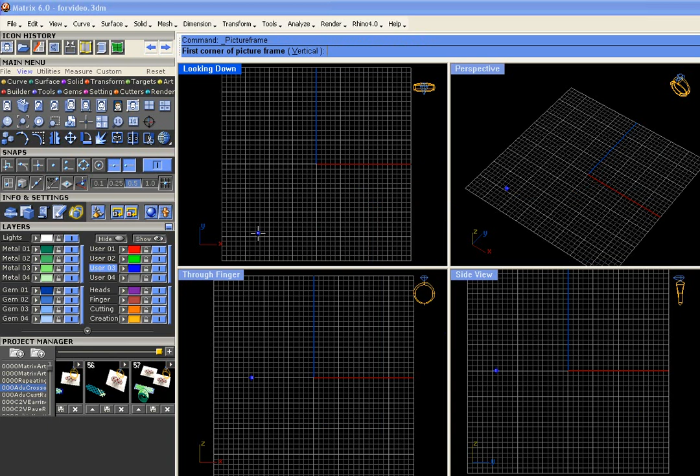Okay, once you've found that image, hit open, and the next thing will be to click Shift and drag the bottom edge of that photo along. Okay, and then you'll be able to center this and scale it to the size of the actual ring so you get some idea of the size this should be. So let's begin with the finger size, the finger rail, and then we can center this on the finger rail about 2 millimeters past the edges of it. That's actually not so bad.

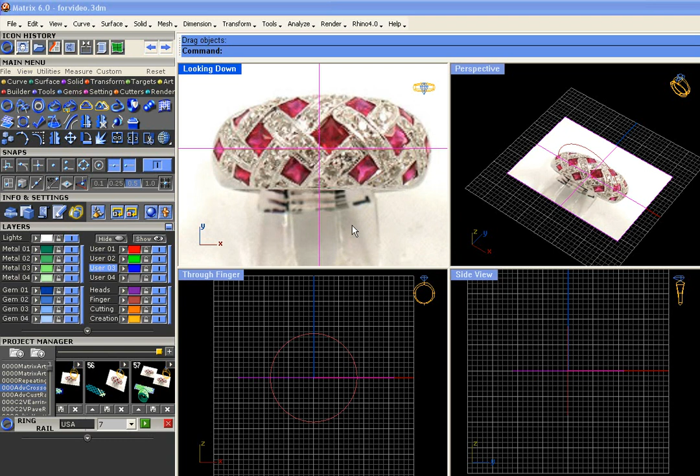Okay, or if you prefer, you can just click and drag this off. The picture frame is a great tool to use because you can just pick up the surface and drag it around. The only thing is I like to put it on a layer color I don't use a lot, such as lights, and then lock that layer. And that way I can't accidentally select it.

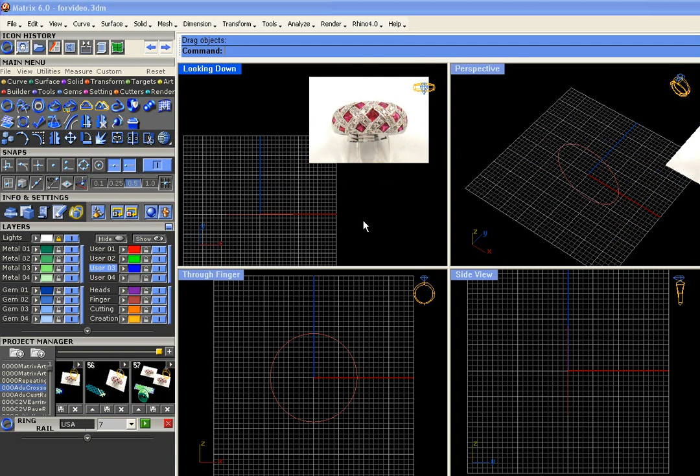Okay. To begin creating this, let's draw the taper for this ring in the side view. To start, I'm going to just place the curve tool line with the both sides option here right at the inside of that finger rail. And as I hold down Shift, I'm going to drag this out to the width that I want at the bottom of the ring. I want it a little wider actually, so right click, both sides, click and drag that out. Okay.

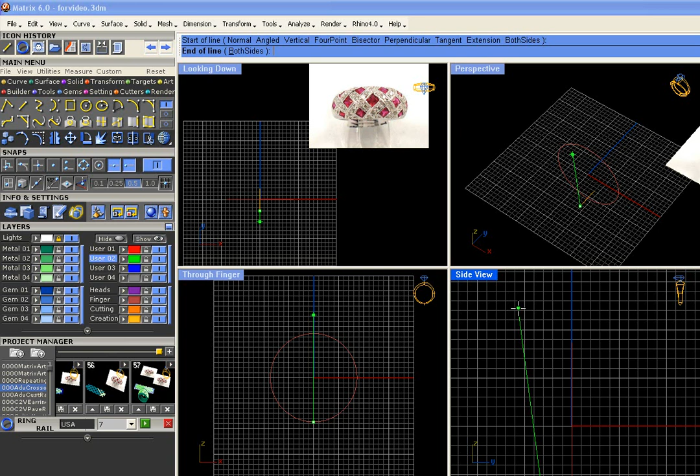The next thing is going to be to create this taper with the line tool. Just click into the end right here and extend it pretty far up past the top of this to the width you want for the ring. F4, Shift. Okay. I just mirrored that to the other side using F4. Okay.

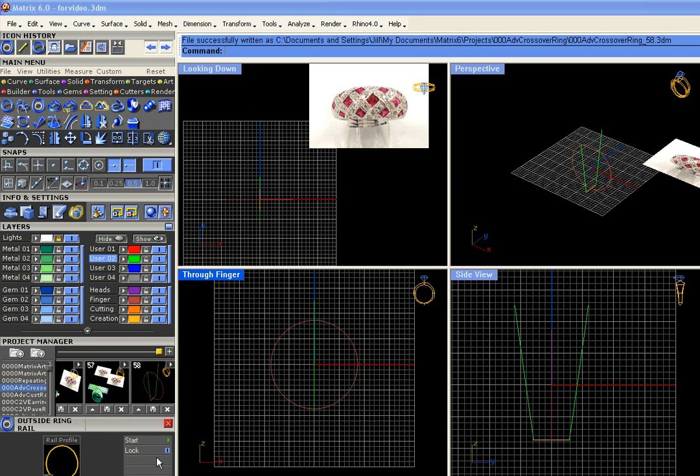The next thing will be to place the outside finger rail here. With the outside rail tool, just hit start and you'll get all the handles for that. We're actually going to just create the side of the ring using this. So we're going to draw this up to 1.5, this down to 1.3, and this the bottom up to 1 millimeter. Holding down Shift, you can get those right on. Okay, press Enter to keep that.

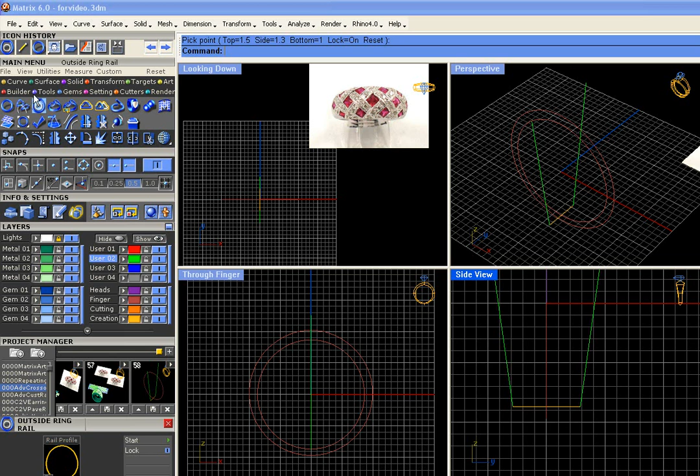And using Curve from Two Views, we're going to be able to place the outside and inside finger rail on an angle with these two curves. Before we do that, as you know, these curves have to extend down past the end of this rail, which they don't yet. So we're going to run the extend command. That lives right here in the curve menu. Just press Enter for dynamic extend.

We're going to extend this guy and this guy. Okay, and what happened there is Rhino history is turned on, so when you extend one curve that has been mirrored, its mirrored copy also does the extend. So we can turn that off. It sometimes messes with matrix history. Okay, and let's drop back this.

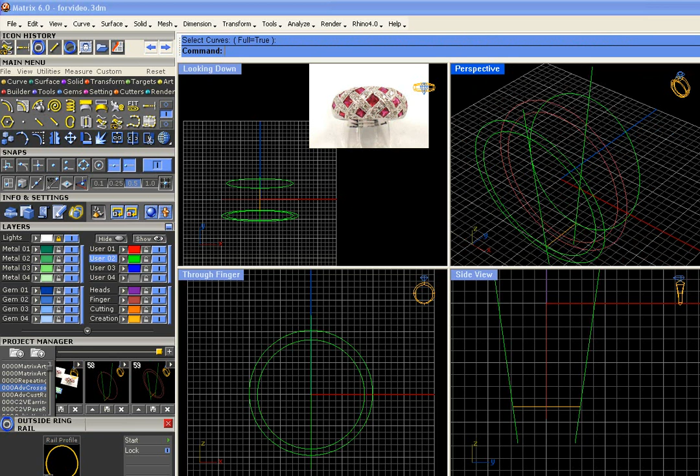Alright, curve from two views is going to give us two curves that match the angle of the green lines there. So let's run curve from two views with history with the inside finger rail and one line. Repeat the inside finger rail and the other line. Repeat the curve from two views with the outside rail and the line. And one more time with the outside rail and the line. And there you go.

Okay, we're going to look at creating the profiles for this. Now, I like to hang on to the original curves, so select these, run the duplicate in place option, and with one copy still selected, place those in another layer color and turn them off. That way you've got a copy saved. We're going to take the originals here and split them with the two sets of curves that touch them. Okay, we can get rid of everything we don't need.

Delete that, and what we're left with are curves that touch precisely. We're going to be just surface modeling this little ring. It's a pretty simple ring, but we want to make sure everything lines up. We're going to show you how to do that.

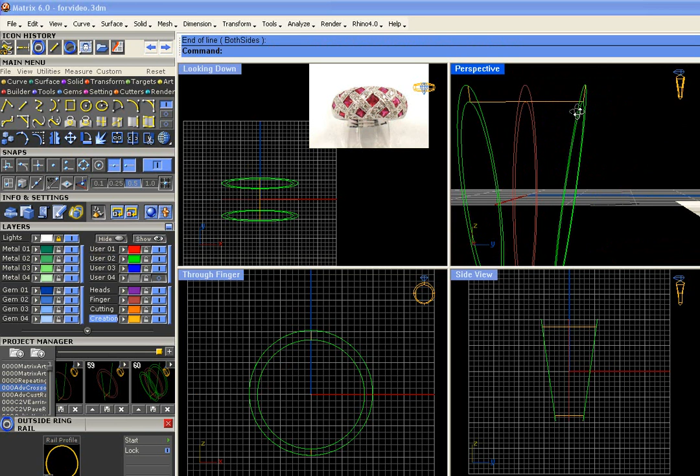Okay, so right now these profiles touch these rails perfectly. Okay, with the line tool again, we're going to draw a profile that extends between these two and touches them end to end. So we've got a matching at the top and the bottom. And we'll go ahead and job bag this.

And now with our arc direction tool, we're going to create the bend in this ring. So grab the arc direction and touching the end and the end, we're just going to draw this as high as we want for the profile on the ring. So about 2 millimeters there.

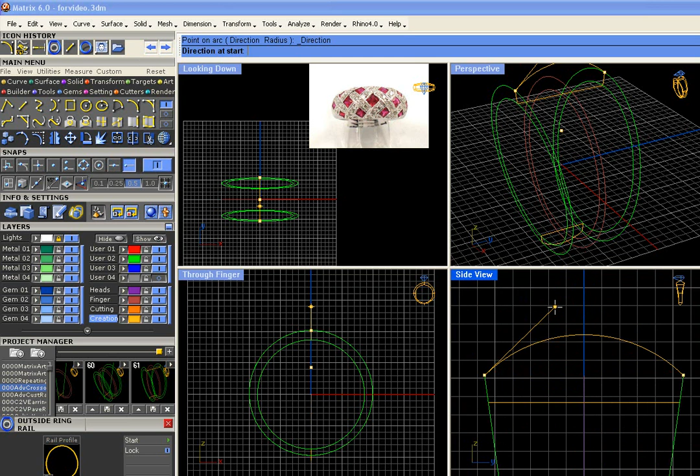Same thing at the top. Between the end, we should have an end in there. Between the end and the end. And just draw that up as high as you want. And in this way we can create a different curvature at the bottom as at the top.

We want this to really poof up more at the top. In fact, we could even do that a little bit more and really get that thing tall and puffy at the top. Okay, job bag this.

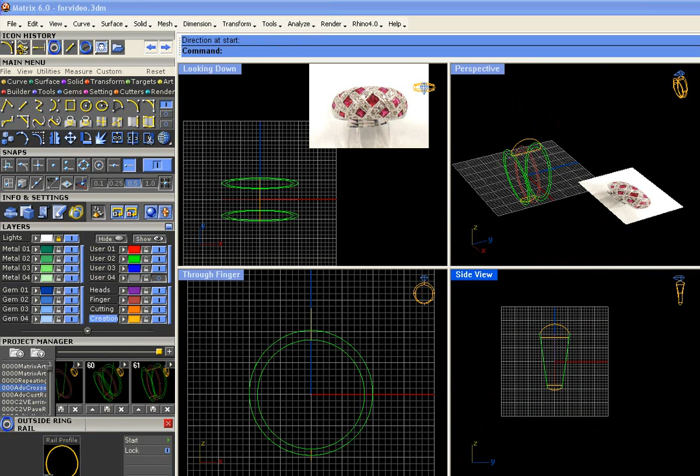Okay, notice that we didn't join these profiles together. We're all ready to sweep them in 4 separate sweep 2 operations. This is exactly what multi-rail sweep does, only we're going to control it so that we get 4 separate surfaces in the end. So sweep 2 between the 2 rails and the profiles that touch them.

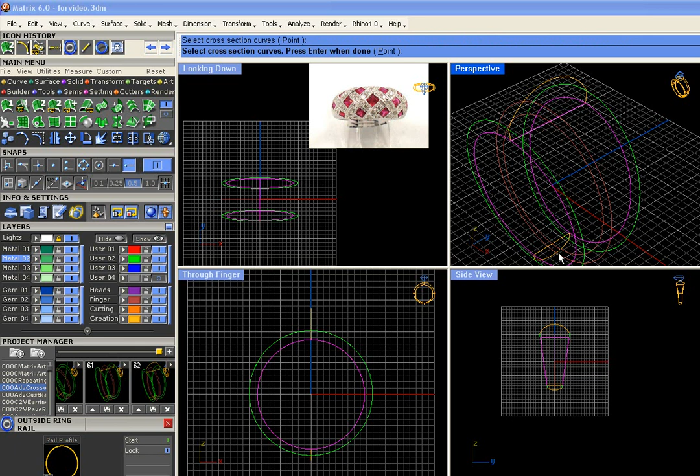Okay. Oops. Oh, we can mirror the whole thing afterwards anyway. Sweep 2 between the 2 rails and the profiles. Oops. Sweep 2 between the 2 rails and the profiles that touch them. We can mirror this guy.

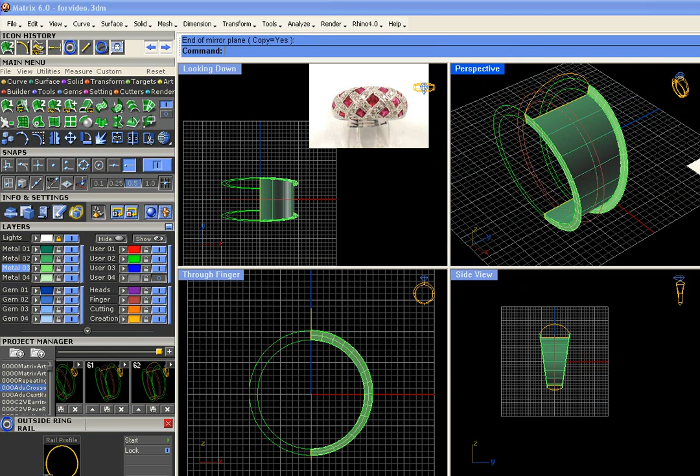F4, shift. Sweep 2 one last time between the 2 rails and the profiles that touch them. Okay, you can see the really nice shape of that.

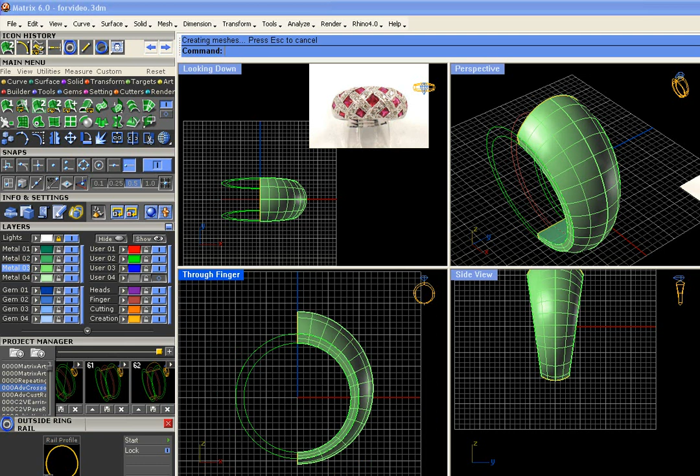And we can take all these surfaces, join them up, and mirror them to the other side of the ring. F4, shift, and join everything together. And it should create for you a closed solid poly surface if you join the inside. I forgot to mirror and join the inside. Join your closed solid poly surface.

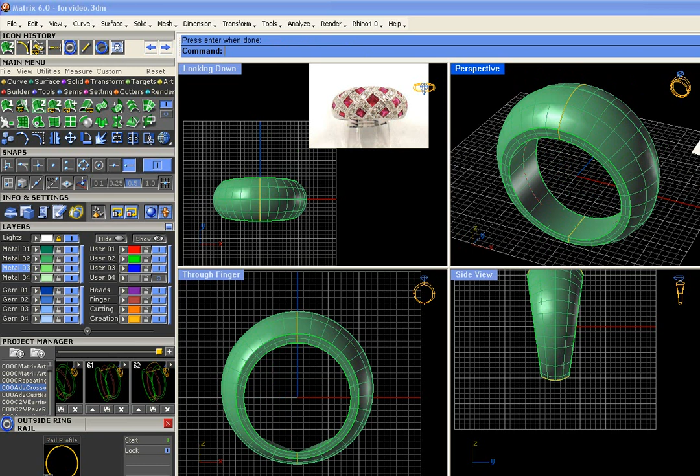Okay, get used to that. We're going to be checking for that a lot during this tutorial. It's a pretty tricky one. Okay, remember how I said I like to keep those curves around? Let's bring them back right now. They're right here. And we'll offset them to create a shape for the inset surface that all this stuff is going to go onto. Okay, so let's offset these one at a time here.

And if you're not sure exactly how far you want them, just use the through-point option. And when it looks good, click. Okay, you can either mirror this or just offset the other one. We'll mirror it. And we'll put them on another layer color so you can see them really well. Cutting layer. Okay, and also determine how far down the ring you want that little surface to end.

And with the line tool, making sure project is turned on, because we're going to draw this straight, flat in the viewport. Just draw about the shape for that. Notice how it comes to a V here on the side. Trust me, it comes to a V on the side. And go ahead and mirror this one, F4, shift. Now we can take all the orange colors, hit trim, and just get rid of the parts we don't need from this shape.

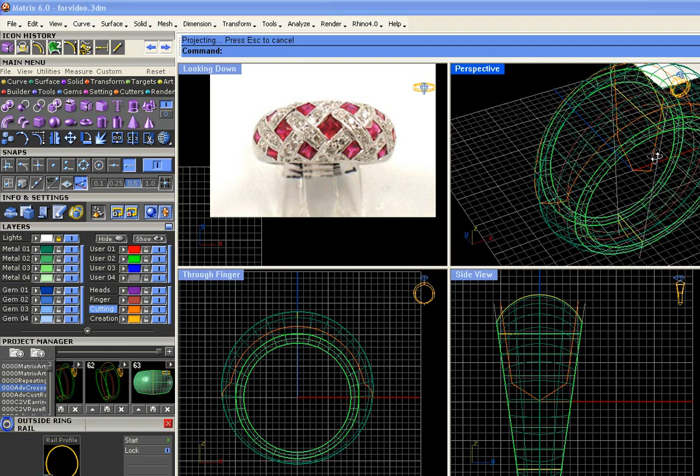Okay, so in the side view, we're going to run project, grab our orange curve, press enter. The surface to project it onto is this green. Press enter, and there we go. You can see that it projects around the entire surface. Okay.

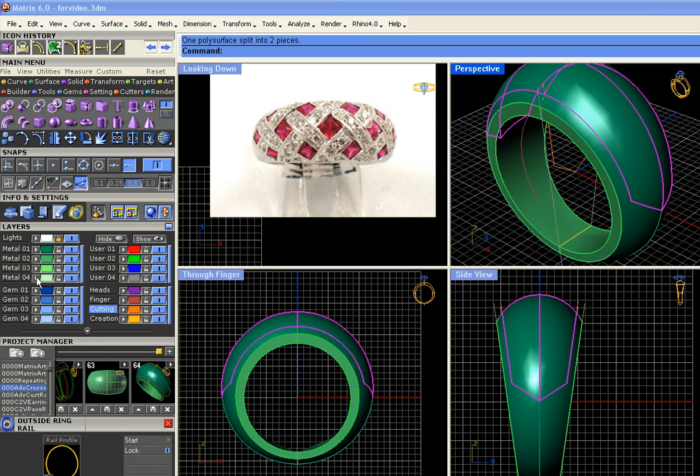We're now going to split the green surface with the orange curve. One polysurface has been split into two pieces, and there's one piece and there's the other. So let's take that first piece, put it on a new layer color here so we can get a good look at it. Now we're going to scale this down in order to create the inset surface. So let's select just this surface here, run the transform command, scale 2D, and then looking down from F4, we're just going to click shift and scale this down a little ways.

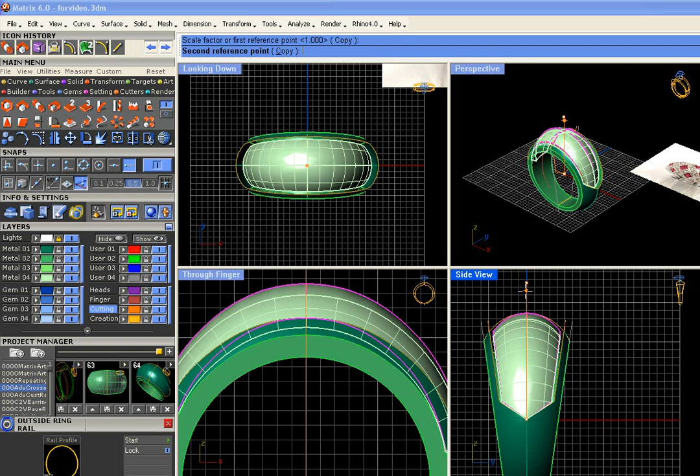Notice that it's scaling it smaller on the top and the sides, which is good, but the very top of the surface is still all the way up at the top of the ring. So we use 1D scale from the end osnap up and just scale that down, making sure you're holding down shift so it doesn't make things go out of whack here.

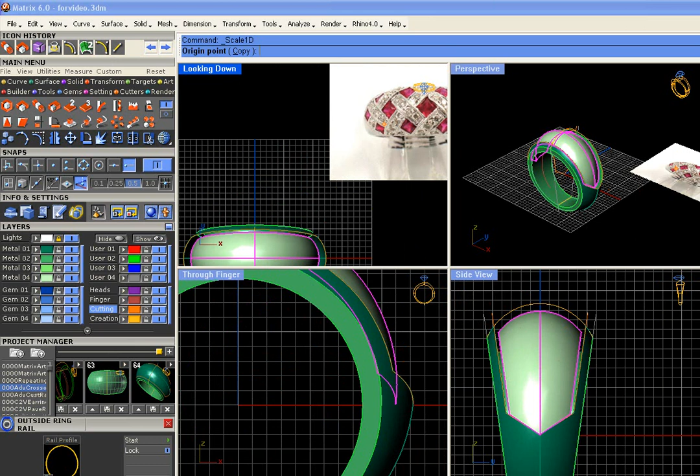Then just depending on how you want this to look, you can finagle it a little more. We're just creating an inset that all this stuff is going to be put onto. So all this stuff is going to be just about planar with the top of that ring. So you're not going to see this really weird shape on the side. Of course, you don't see it here. We're just making a surface to flow this whole design and to lay these gems out on. So you don't have to really worry about that so much. So let's leave it all uniform there. Let's job bag this.

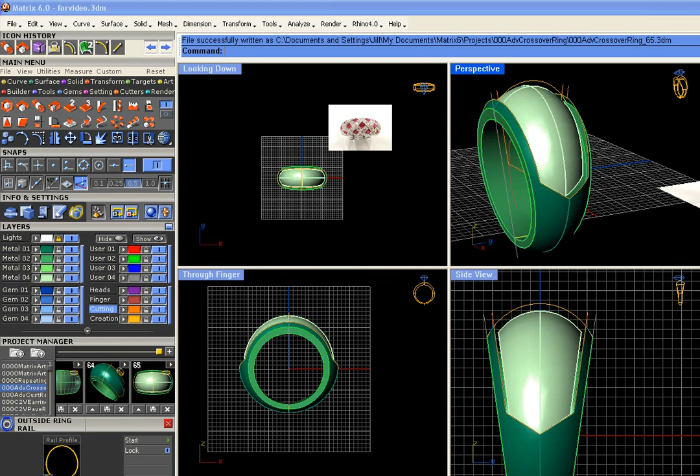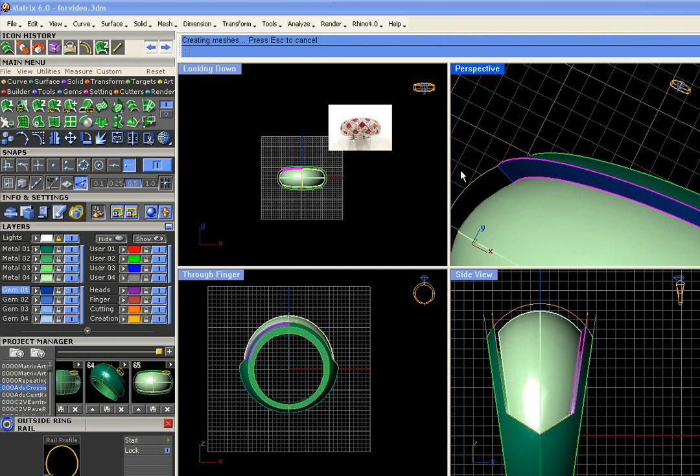And to create this as a solid model so that we don't get all lazy here, we're just going to close it up with the loft tool. So with yet another layer color, go to the loft command and just work your way around the edges that line up. Okay, and we'll go around this whole ring, lofting between these edges. Oops, not that edge, this edge. Okay, and I'm just going to pause the video while I do this because it's boring.

Oh, that was so boring. I almost put myself to sleep.

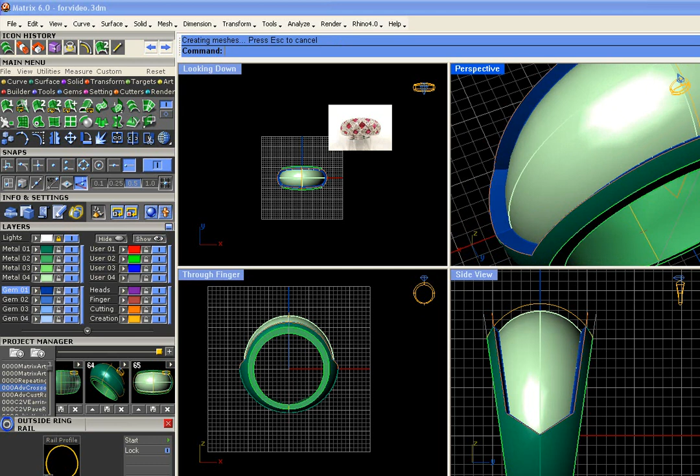Okay, so just notice that all the edges are lofted. They're little surfaces. Just don't get lazy and mirror these. Just make sure you build them all because you want this model to be solid in the end. So let's grab all these, and all these.

Does anyone else have trouble telling between those two shades of green?

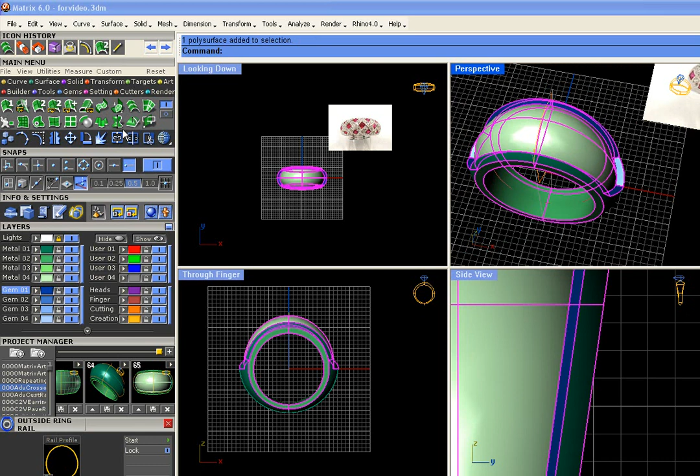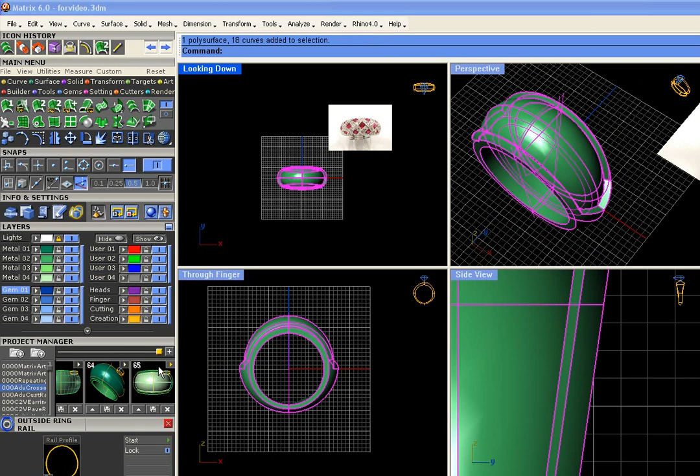And join. Okay, we're definitely missing a green. Join. And check it out, and it's closed. That's good to know. And we'll job bag this. Okay. However, this is not the surface that we're going to flow this design up onto because we need an untrimmed surface for those little UV curve commands, and this one has